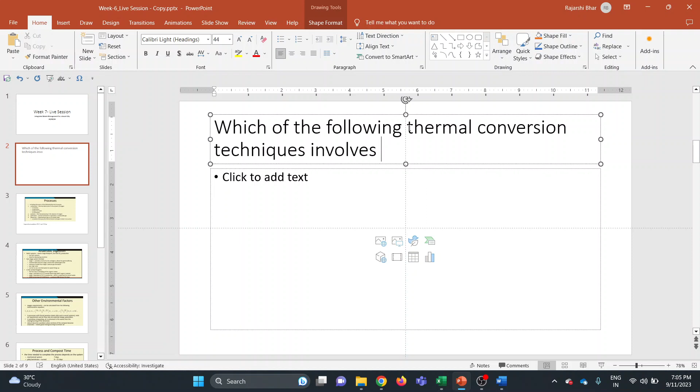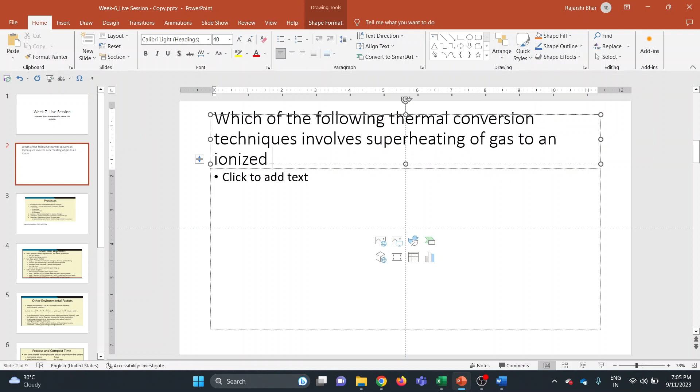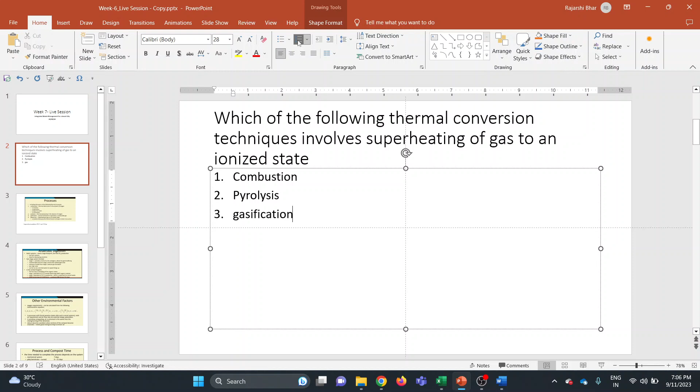You have to choose an option wherein, which is a thermal conversion technique, wherein the gas is superheated to an ionized state. Your options are combustion, pyrolysis, gasification, and plasma.

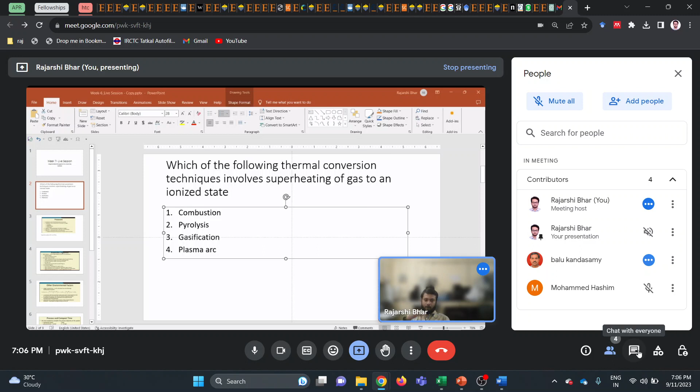Okay, fine. So for this particular question, the correct answer was plasma arc, and I will discuss these individual processes as well. Like combustion, most of us have known from very early days that combustion is basically burning of a material in the presence of oxygen. So that is combustion, or there is an oxygen rich and oxidative environment that exists when combustion takes place.

Pyrolysis typically takes place in an inert atmosphere. That inert atmosphere is created by flowing nitrogen over a heated material, or flowing other inert gases like helium, argon, such noble gases. So those kind of high temperature activities under an inert atmosphere are often called pyrolysis.

Gasification is not complete combustion, in the sense that there is a partial oxidation kind of situation here, a partially oxidative environment. So under those circumstances, gasification takes place. It is somewhere in between pyrolysis and combustion.

But plasma arc is a very, very high temperature process, above 5000 degrees centigrade, or in fact about 10,000 degrees it can go. Such high temperatures exist wherein whatever material you subject to plasma arc will mineralize, not only mineralize, it will ionize to the very basic levels because of its very high temperature. So technically speaking, you put in any contaminant, any raw material, and it will completely ionize it.

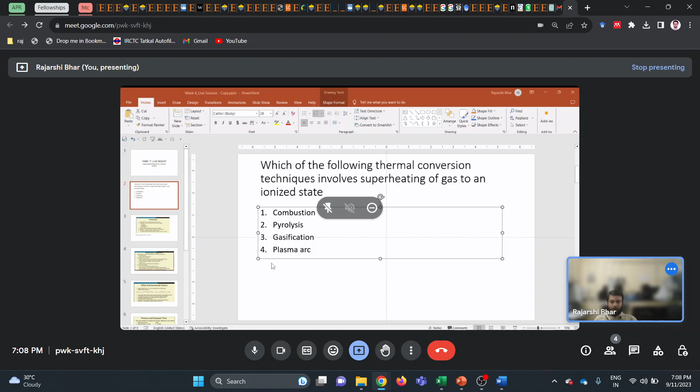But on the downside, why don't we use such techniques? Because they are very, very energy intensive, and sometimes it doesn't make sense to go for plasma arc for any kind of waste management technologies or approaches. For certain specific instances, one may choose to go for plasma arc. So this was question number one. Then moving on to question number two.

So you have to choose an option wherein acidogenesis and methanogenesis, which are components of anaerobic digestion, take place separately.

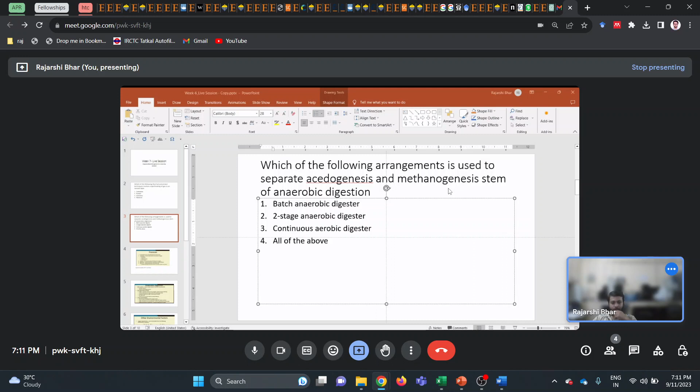That is where methanogenesis takes place, and methanogens can also perform better because they are not getting mixed up with acidogens. Because if acidogens produce acids and it crosses beyond the neutral range, then methanogens' performance gets really degraded, and methane release also becomes very, very less. So that is why it is often beneficial to operate methanogenesis and acidogenesis in two separate tanks.

Let's see if we have anything else.

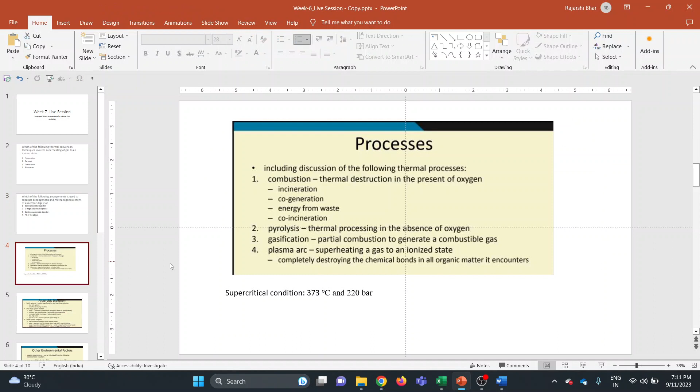Okay, relating to the previous question, I will add a couple more points. Gasification is nothing but partial combustion, and plasma, as I said, completely ionizes the material by breaking the chemical bonds. Gasification can be of different types and for different purposes.

The main target of gasification is to produce gas with some energy value, like syngas or hydrogen rich gas. Those are often the products of gasification. Gasification can be of various kinds, like supercritical water gasification, which is typically used to produce syngas or increase hydrogen content in the gas.

In supercritical gasification, what happens? Supercritical water gasification means the feedstock is in aqueous phase, there can be some solids, but the conditions, the temperature of the water, are in supercritical state. Supercritical state means the temperature should be above 373 degrees centigrade and pressure above 220 bars.

So what happens under those circumstances is that water behaves like an organic material, like a non-polar solvent. Usually water is a polar material, it acts as a polar solvent, but under supercritical conditions it becomes a non-polar solvent, behaves like that. So that is one of the types of gasification.

Then CO2 gasification is another kind. Pyrolysis, as I have said, takes place in the absence of oxygen, and the main products of pyrolysis can be char, pyrolysis oil, and then gas. It can also have significant calorific value based on its combustion, based on its composition.

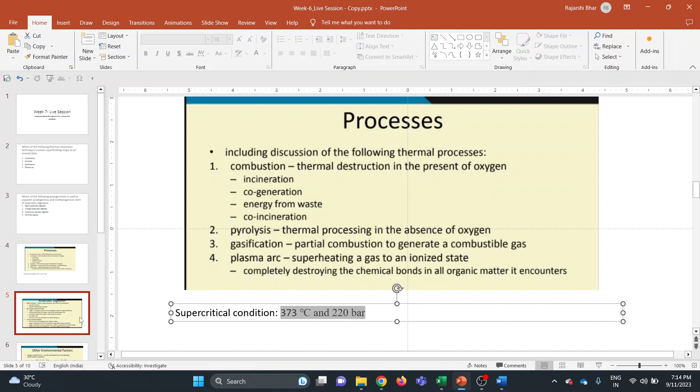And then this is about the anaerobic digestion, the two-stage anaerobic digestion, wherein in the first stage acidogens along with hydrolyzing bacteria are also present, whereas in stage 2, methanogens live.

Now moving on to the next question.

Excuse me, sir, can you ask one question regarding pyrolysis? Pyrolysis, yeah, is a combustion process, it's a thermal process. And you are telling it is done in the absence of oxygen, then how does combustion take place without oxygen?

Actually, combustion and pyrolysis are completely different. When I say that a material is being combusted, by definition combustion means there is a presence of oxygen, an abundant amount of oxygen. That is why combustion is taking place. Basically, if there is a carbon material, C reacts with O2 to form CO2, and if there is incomplete combustion, then some CO may be formed. So if there is no oxygen, then we won't call that process combustion.

It will be pyrolysis under those cases, or some other specific process if something else is taking place. Combustion is particularly only under oxidative conditions. But if you want to describe pyrolysis, the right way is to say that I am exposing a material to high temperatures under an inert atmosphere. So thermal exposure under inert atmosphere is the correct way to briefly describe pyrolysis. We can't say that pyrolysis is combustion under inert atmosphere, because combustion itself means that oxygen is present, that is why it is burning.

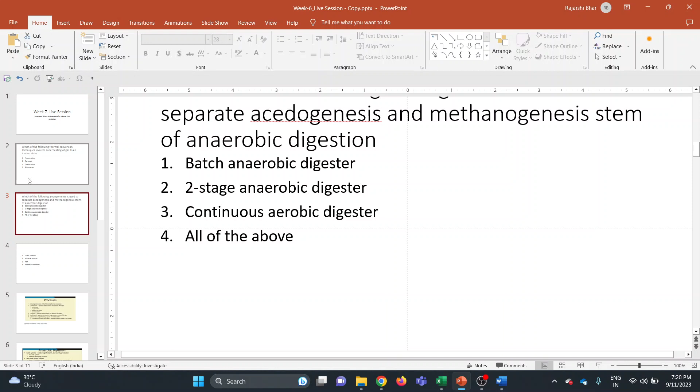Now moving on to the next question, whose answer I think you will be able to say right away.

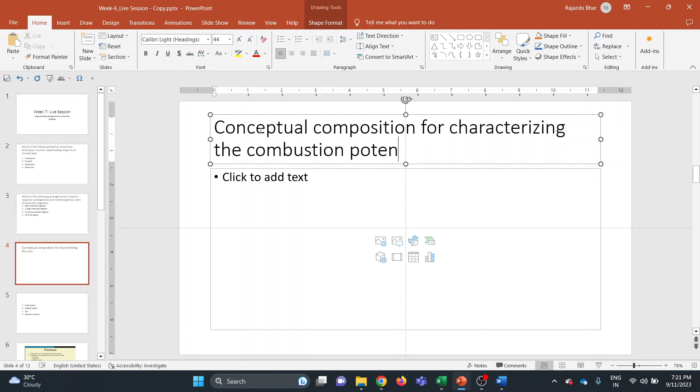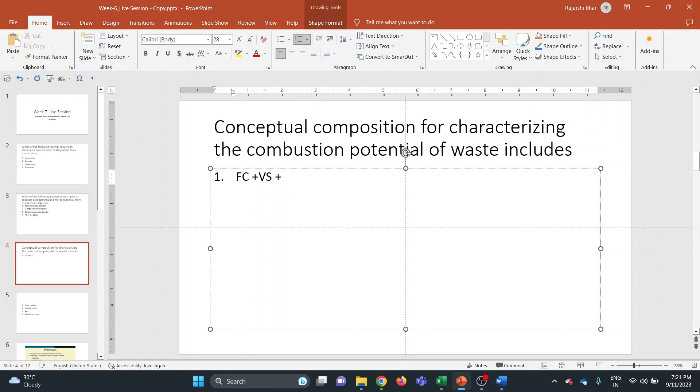Conceptual composition for characterizing the combustion potential of a waste includes FC stands for fixed carbon, VS stands for volatile solids, IN stands for inorganics plus ash plus water.

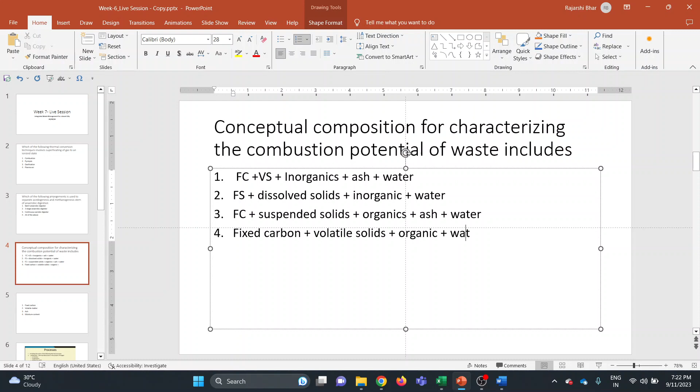Out of these four, which one do you think is the correct answer? Yes, option A is the correct answer for this question.

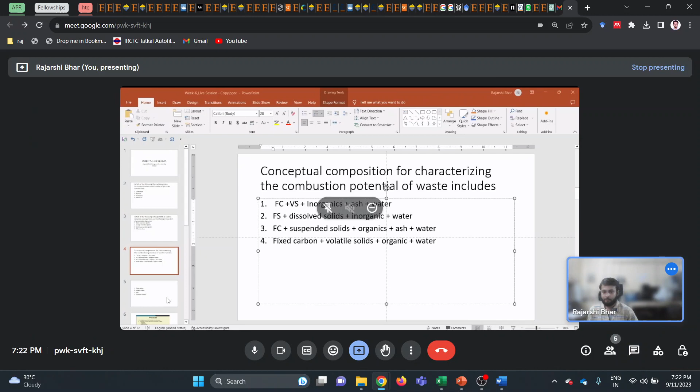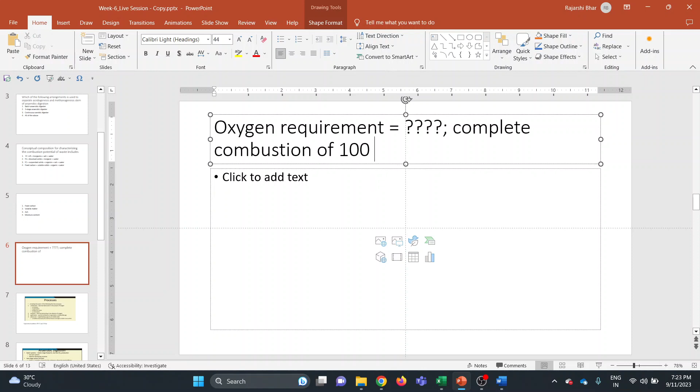Now moving to the next one. This next question is a very easy and simple numerical based question, and I won't be sharing the options with you. What is the oxygen requirement for complete combustion of 100 grams of methane? That is what you need to calculate.

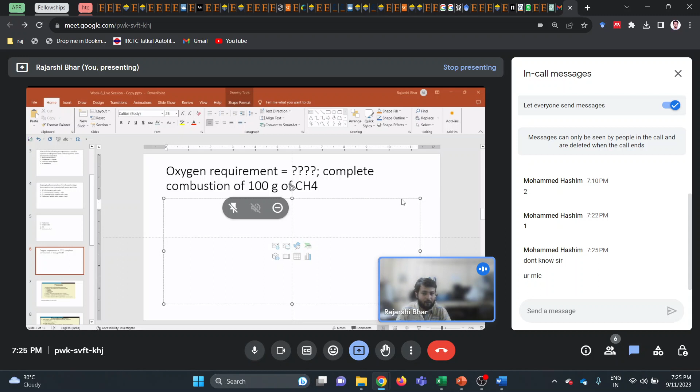Okay, so I will give you a hint. We can solve this question stoichiometrically based on the equation of how methane reacts with oxygen to form carbon dioxide and water.

You write this chemical equation: CH4 plus O2 equals CO2 plus H2O. Then balance the equation if required. Finally, consider the amount of moles, their molar masses, balance them, and using the unitary method, you can calculate the oxygen requirement.

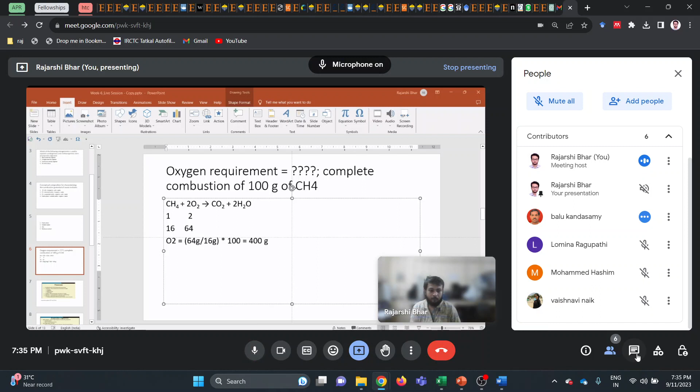Any answers? I would like you to attempt these kinds of questions because they are very simple and there is high probability such questions can also be asked in the final examination. If you have any question or queries, please feel free to unmute yourselves at any time.

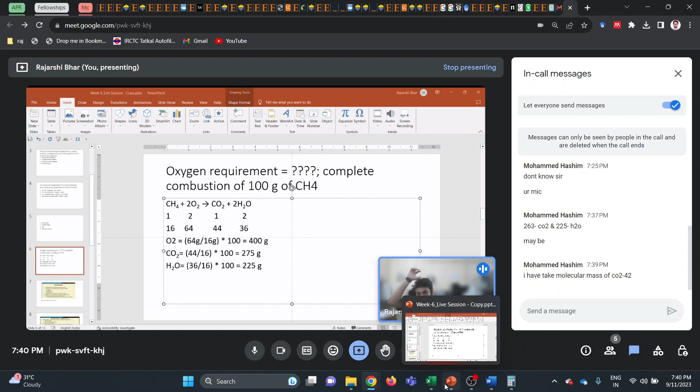Fine, so you can try similar questions. Now we will move on to the next one. For this particular one, you can refer to your notes or the class slides you might have referred to when Professor Dubey was teaching during his sessions or his NPTEL courses. So the question is...

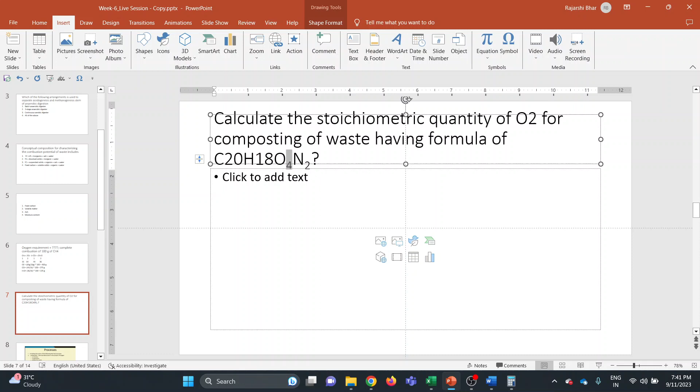So this is the question: you have to calculate stoichiometrically the amount of oxygen requirement for a material, a biomass, having this chemical formula. I will initially give you a hint that you can refer to the class notes of Professor Dubey. In case you are not able to find that, please ping in the chat box, and I will share the equation with you, and I hope you will be able to solve it. In the meanwhile, I will share the options.

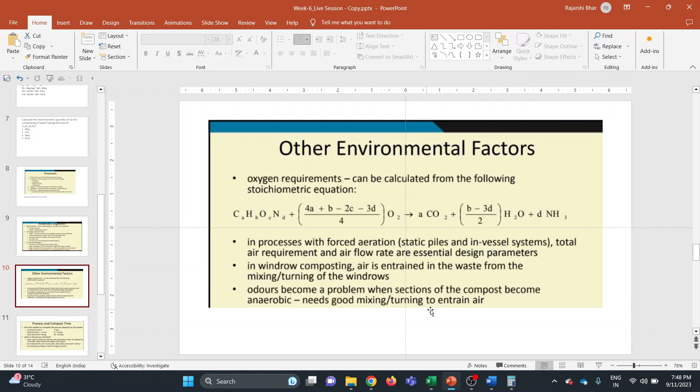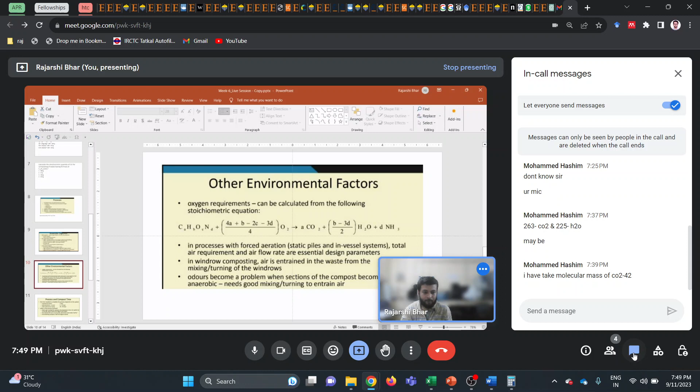If you calculate it, which is now very simple and easy, you will get 672 as the correct answer, that is option B. So now I will move on to the next question.

So when can you say that the compost has become matured? Your options are...

So which one do you think is the correct answer? Yes, option A is the correct answer.

Now moving to the next question. So I will also see if I have any points for you or not. Okay, so this is from where you could have seen the answer.

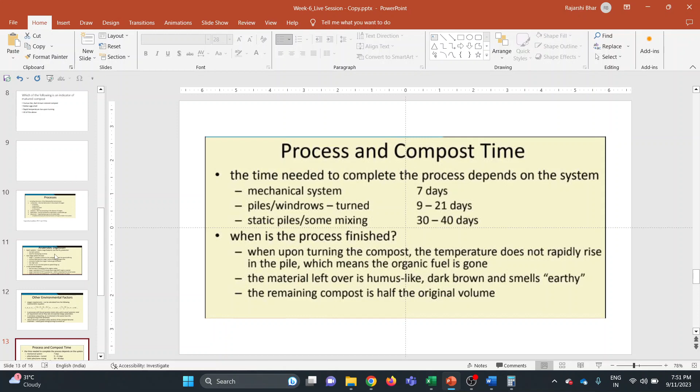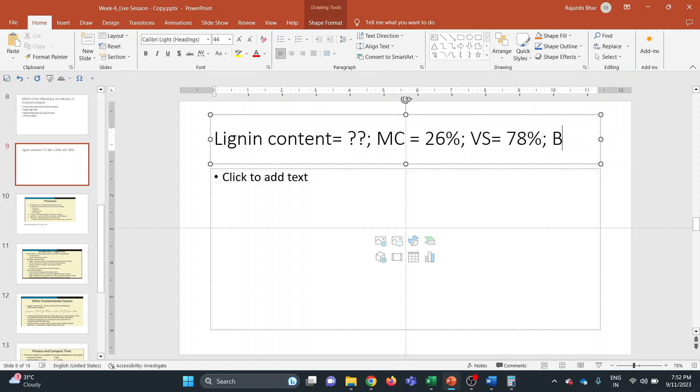Now we will move on to a numerical based question. You have to calculate the lignin content for some agricultural waste, given that MC, moisture content, is 26%, VS, volatile solids, is 78%, and BVS, biological volatile solids, is 59%.

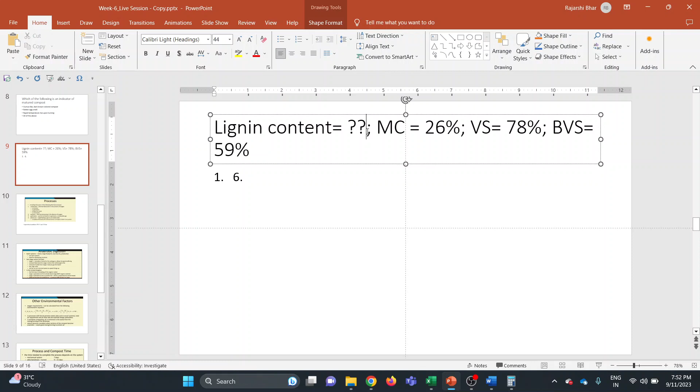Based on these values, you have to calculate the lignin content present in that agricultural waste. Your options are all in percentages. Since I have percentage here, 6.9.

For this question also, there is a small and very simple formula. You can think about it. After that, I will share the formula with you, and then you can finally tell me what the answer is.

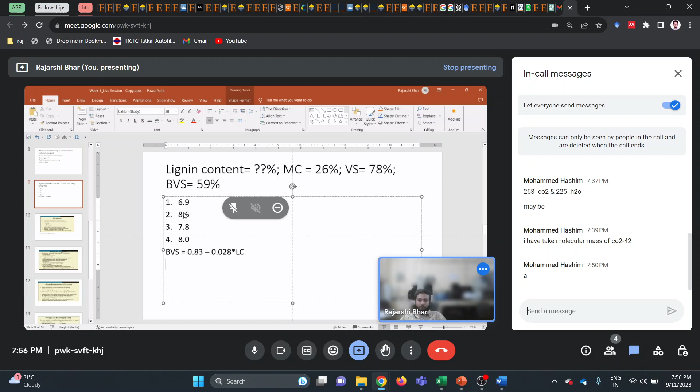So moving on to the next one, it is a theoretical based question.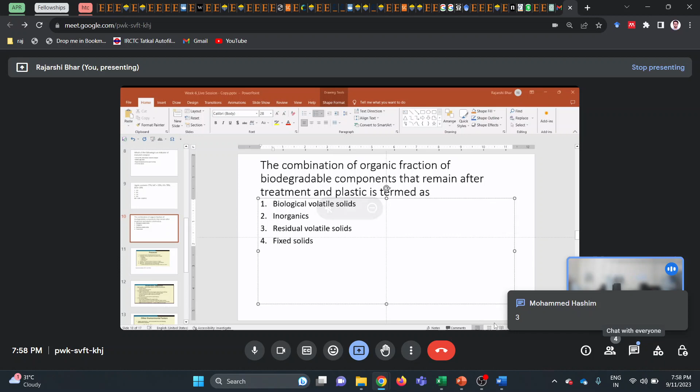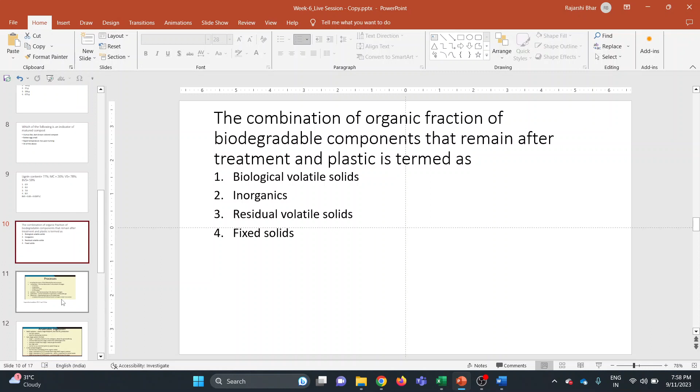Yes, option C is the correct answer. So now moving on to the next question. Let's see if I have any figures here.

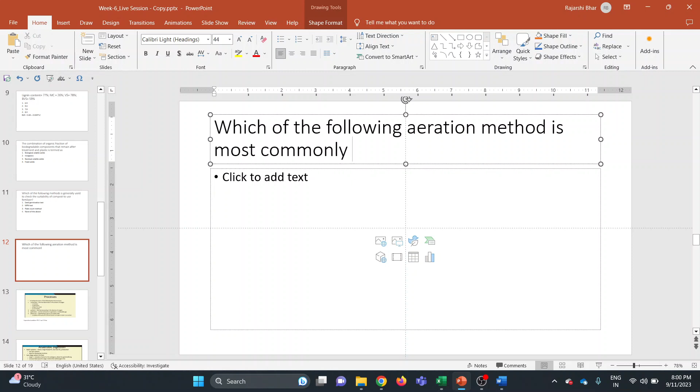Now moving to the next question. During windrow composting, for aeration, which of the following methods will you be using? Yes, option 2 is the correct answer, regular turning.

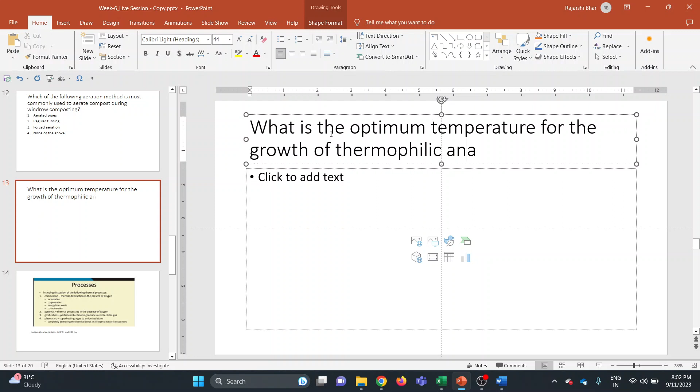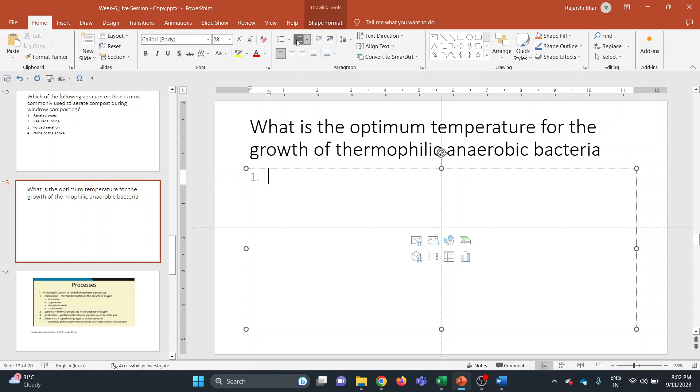What is the optimum temperature for the growth of thermophilic anaerobic bacteria? All the values are obviously in degree centigrade. In this lab,

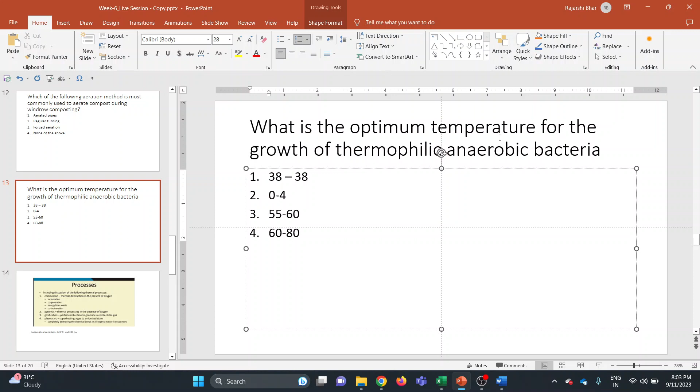Yes, so these are your options. Thermophilic anaerobic bacteria, very easy one. Option 3, yes, option 3 is the correct one.

Now you have to guess or answer the C by N ratio during the curing period of composting. Yes, so these are your options. Yes, option 1 is the correct answer.

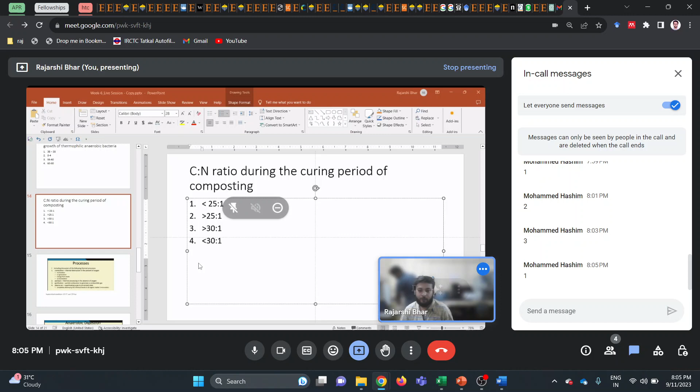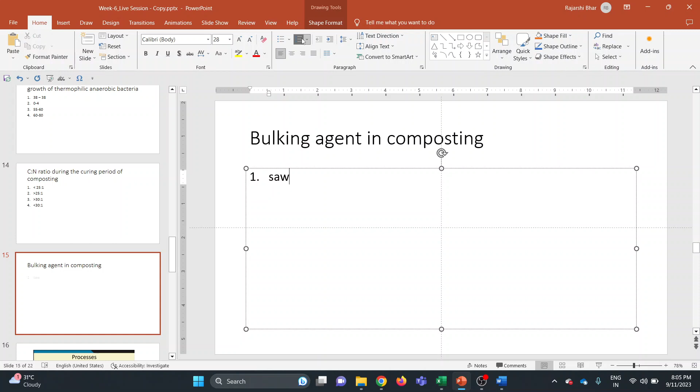So quickly moving on to the next question. Which of the following is used as a bulking agent in composting? Your options are sawdust, food waste, immature compost, or none of the above. Yes, option 1 is the correct answer.

Now moving on to question number 14. Excuse me, I have a question about sawdust. It was mentioned that for a bulking agent maybe 25mm particle size is required, but sawdust will be very fine, so how would it work as a bulking agent? So 25mm less than size, and sawdust will be very fine, so how will it act as a bulking agent?

If you see sawdust, it is very light and occupies a lot of space. If you see a heap of sawdust by itself, you can see that it absorbs lots of water, so there are lots of pores in it. Overall, it kind of adds bulk to a mass, adds volume to something, so that is why it is added as a bulking agent. Okay.

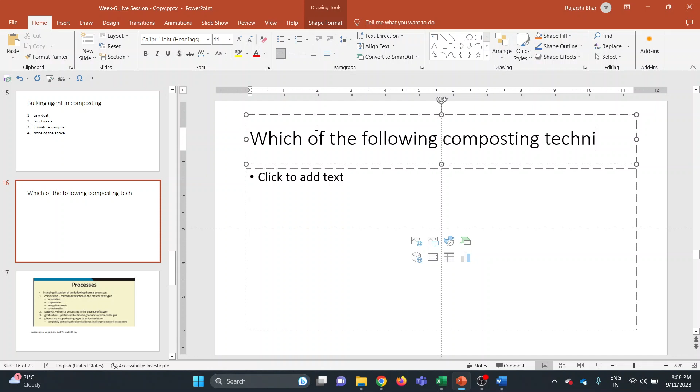So moving on to question number 14. Which of the following composting techniques is generally adopted in industries? Your options are aerated static pile composting, windrow, mechanical or in-vessel composting, or none of the above. Very simple question. Yes, mechanical or in-vessel composting.

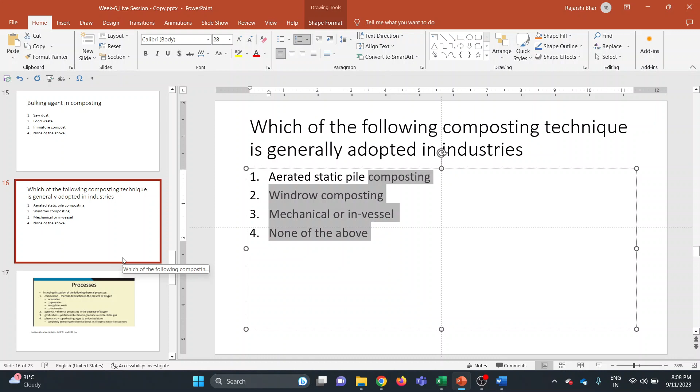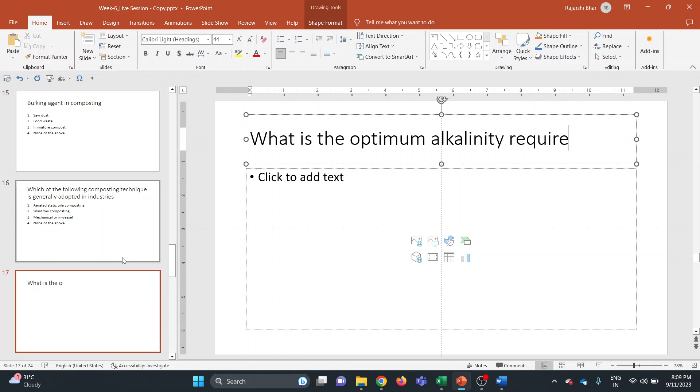So now the final question of the day. AD means anaerobic digestion, SW means solid waste. What should the alkalinity be? And all these values are in milligram per liter as CaCO3, calcium carbonate. Here also the same units will be there. So which one do you think is the correct answer? Yes, 1000 to 5000 is the correct answer.

Okay, fine. So these were the 15 questions that we had for us today. I will quickly go through all these questions again, in case if you have any doubt you can ask it. Okay, fine, so quickly going through these questions, the first one.

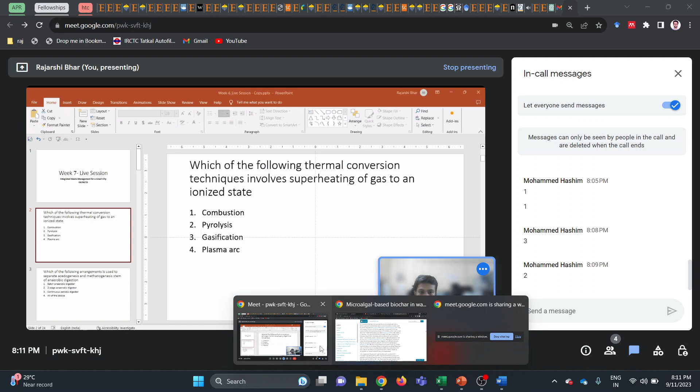So the first question was, out of these thermal techniques, which one includes superheating of gas to an ionized state? Among these four options, combustion means basically thermally exposing any material in the presence of oxygen, so then combustion takes place, which includes incineration, cogeneration, co-combustion, all those kinds of stuff. Pyrolysis basically means when I am thermally exposing a material, the temperature can easily go above 400, 600, 700 degree ranges. The material is thermally exposed to such temperatures in the presence of an inert gas to maintain an inert atmosphere, and those gases can be - one of the cheap alternatives is nitrogen, and if you want to go for better ones, although costly, they can be noble gases like helium, argon, and like that.

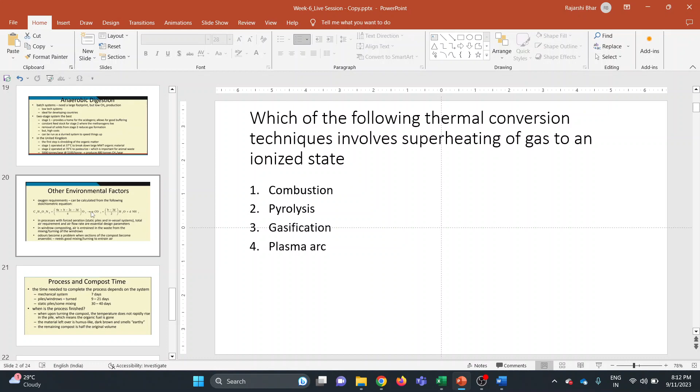After that comes gasification. Gasification is a partial combustion process, that is by definition, and gasification can be of various kinds, like there is CO2 gasification, catalytic gasification, depending on the purpose, on the goal of the process. Then comes plasma arc, where the temperature exceeds above 10,000 degrees centigrade, and what happens here is that the temperature is so high that the bonds themselves start breaking - they also start breaking during pyrolysis and gasification, but in plasma the breakage is 100%, everything gets ionized. That is why it is one of the most efficient processes to get rid of any material, but the downside is it is very, very costly.

So now the question is, when do we do these processes?

So combustion, like for example, when we segregate our municipal solid waste that is generated, if it has a good appreciable calorific value, the segregated waste which contains plastic, paper, and other high energy value stuff, we can send it to incineration plants or cogeneration plants, or energy from waste or co-incineration plants, where they are burnt standalone or along with other material to generate heat, because combustion is an exothermic process.

Then comes pyrolysis. In combustion, what are the major end products? They are CO2 and water plus heat. There can also be, in case of incomplete combustion, carbon monoxide, and if your material has sulfur and nitrogen, then SOx, that is sulfur oxides and nitrogen oxides, are also generated. Basically, because it is oxidation, oxides are generated.

Since pyrolysis takes place in an inert environment, some of the major products coming out of pyrolysis fall into three phases: solid, liquid, and gas. In solid phase, it is char. In liquid phase, it is pyrolysis oil. In gaseous phase, it can be called pyrolysis gas, or based on its composition, sometimes syngas, if it has mostly CO and hydrogen, carbon monoxide and hydrogen. Depending on the intention of the process and the type of pyrolysis, the amount of char, oil, or gas generated can vary significantly.

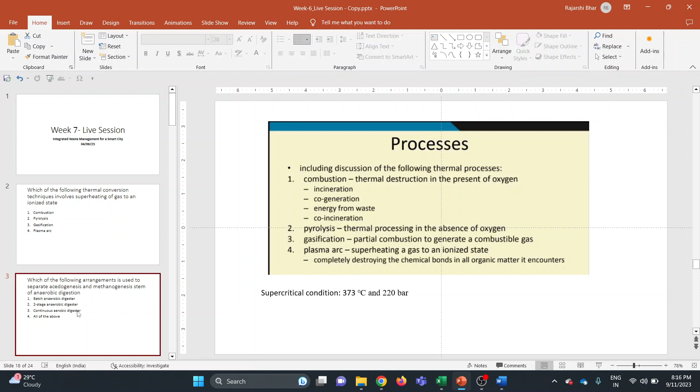So this was about question number 1. The next question was, which arrangement is used when we have to do acidogenesis and methanogenesis separately? The correct answer is two-stage anaerobic digestion.

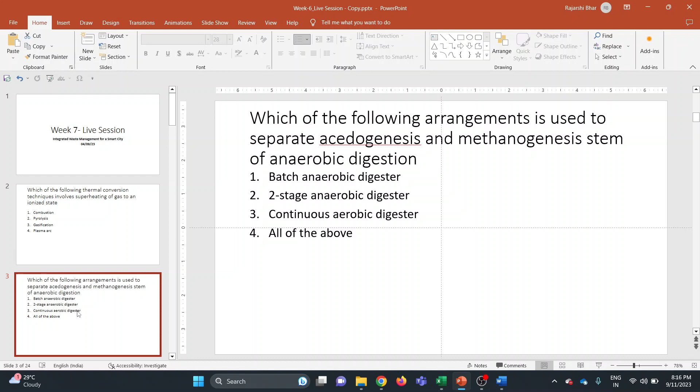In the first digester, the primary activities taking place are hydrolysis and acidogenesis. Since gas is not mainly formed in those conditions, the dome above those tanks is usually fixed. But in tank 2, where the major activity is methanogenesis, it has a flexible dome so that the gas produced can be stored above the supernatant, and the volume can adjust based on the quantity of gas produced.

After that, proximate composition of waste when we have to look at its combustion potential - the correct answer is option 1. That is, we have to look at fixed carbon, volatile solids, inorganics, ash, and water content.

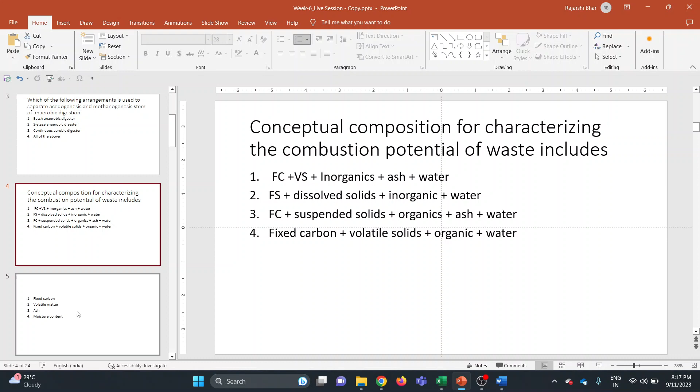Then the next question was to calculate the oxygen requirement for complete combustion of methane. The amount of methane was shared with you in those. This is one of the very important questions that I expect to come in the examination as well, because these are very simple, very basic.

Write the chemical equation, balance it, look at how many moles are required for this reaction to take place, write their molar weights, and then calculate the oxygen requirement using the unitary method. So 64 grams of oxygen was required to burn 16 grams of methane - how much will be required to burn 100 grams of methane? Simple as that. Similarly, 44 grams of CO2 was produced when 16 grams of methane was burnt, so how much will be produced when 100 grams is burnt?

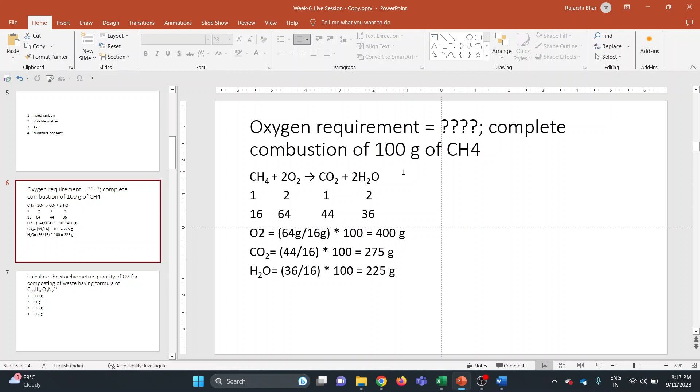After this, you have to calculate stoichiometrically the quantity of oxygen required for composting waste having a given formula. These are based on equations that you often need - I don't think you need to memorize most of the time, because ideally these should be given in the examination, but in case that's not the trend, it's better to practice multiple times so that if it comes, you can attempt it. Using this particular equation, you can determine the oxygen demand, and A, B, C, D are basically the subscripts of the molecular formula of the waste.

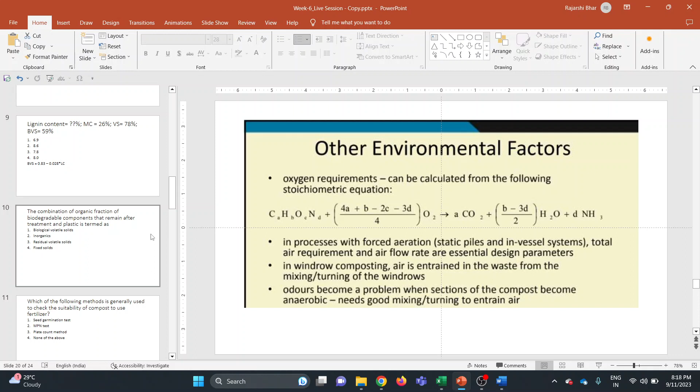Then you have to calculate the total lignin content. What you were given is moisture content, volatile solids, and BVS—these two are given only to distract you. If you know this particular formula, BVS is 59%, so put 0.59 here. Rest everything is given, LC is left, just calculate LC, that is lignin content.

These kind of questions, based on the biochemical or biological composition of a waste, why it is important is that, for example, I am giving you two kinds of wastes. I have discussed this similar concept during the initial few live sessions as well. Lignin is basically made of aromatic structures, which are very difficult for microbes to act upon and finally break them.

So usually in a material, if I am trying to degrade it biologically, if the lignin content is high, the time to degrade that material will be more. And in the same constant amount of time, comparing with other materials, bacteria will find it more difficult to break these bonds, so the degradation efficiency will also be lower for the same constant time.

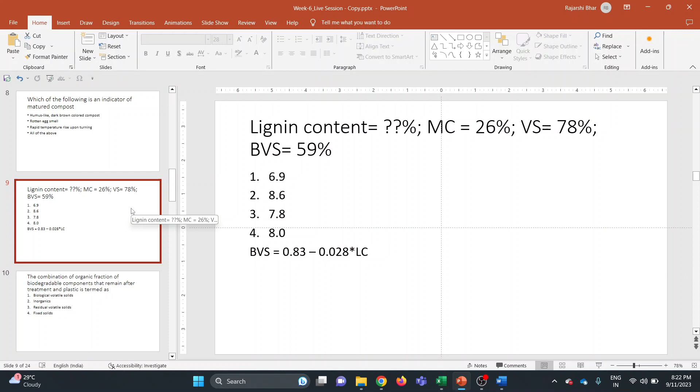You can do a certain degree of pre-treatment, which can be heat treatment—pure heat, or if the waste has moisture content, there are various methods like steam explosion or hydrothermal treatment. These treatments basically break the bonds in the macromolecules. Other than that, acid treatment or alkaline treatment can be used. They all serve similar purposes: breaking the bonds and making it easier for bacteria or other microbes to work upon the waste material and use it as substrate to produce the desired end products.

So finally, this question has already been discussed. Then, which of the following methods is generally used to check the suitability of compost for use as fertilizer? The answer is very obvious: seed germination test.

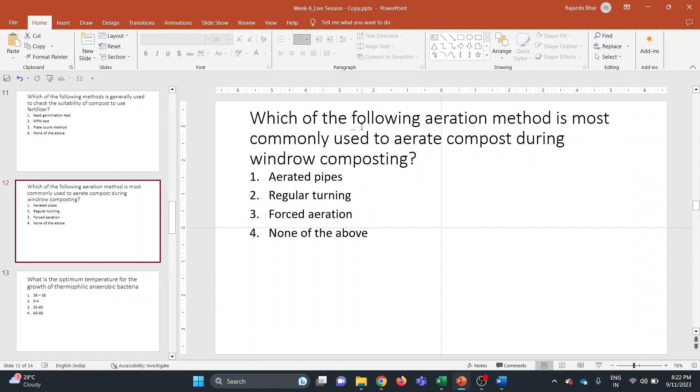Then, which of the following aeration methods is most commonly used to aerate compost during windrow composting? The answer is regular turning.

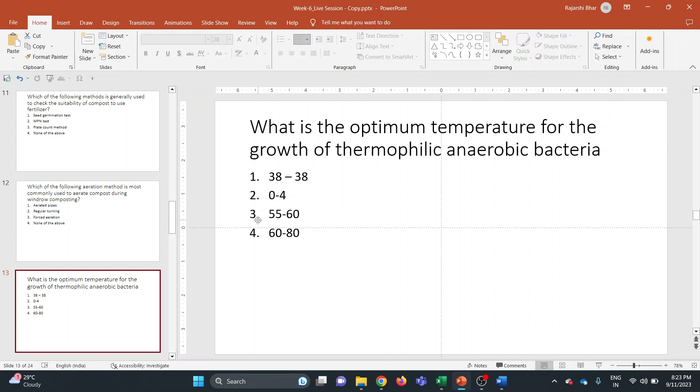Then, thermophilic anaerobic bacteria range 55 to 60 degrees. C to N ratio during the composting period—how much should it be? It should be less than 25:1.

Bulking agent in composting is sawdust, because even if it is, as someone mentioned, less than 25 in size, it is very light material. It occupies a lot of volume, which is why it is known as a bulking agent. That is why it is used.

Then, which of the following composting techniques is usually used in industries: mechanical or in-vessel composting?

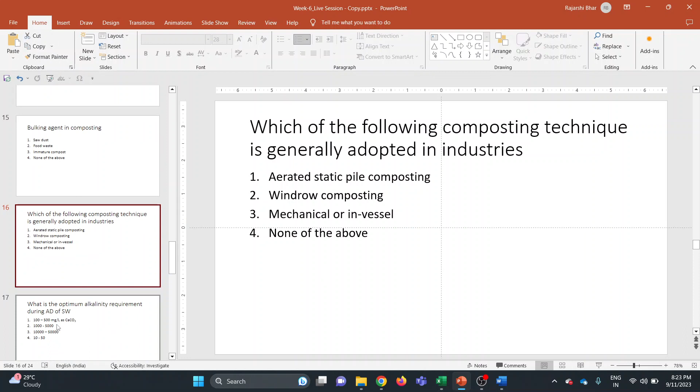Finally, decide the alkalinity level for anaerobic digestion of solid waste, which is 1000 to 5000 milligrams per liter as calcium carbonate. That is the answer.